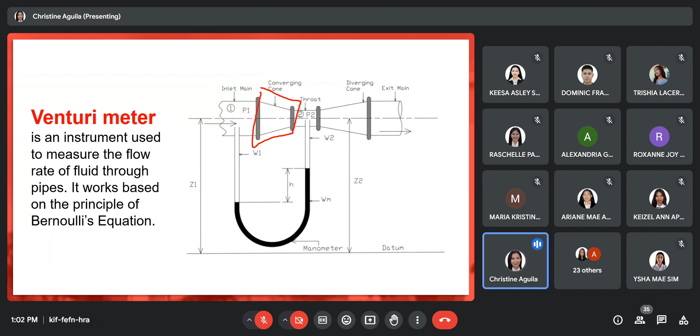So again, the venturimeter consists of 3 main parts. The first is the converging cone, the second is the throat, and the third is the diverging cone.

For example, imagine there's a pipe connected to our venturimeter. The fluid will flow first through the converging cone, then through the throat, then through the diverging cone, and then exit the venturimeter. Because the area of the converging cone decreases—it gets smaller from this section to this section—this decrease in area will cause an increase in the velocity of the fluid.

And of course, when there's an increase in the velocity of the fluid, that means there's a decrease in pressure, right? That's why there's a pressure drop at section 2, because of the area. Again, as the area gets smaller, the velocity of the fluid increases, and because the velocity increases, there's a pressure drop, or a decrease in pressure.

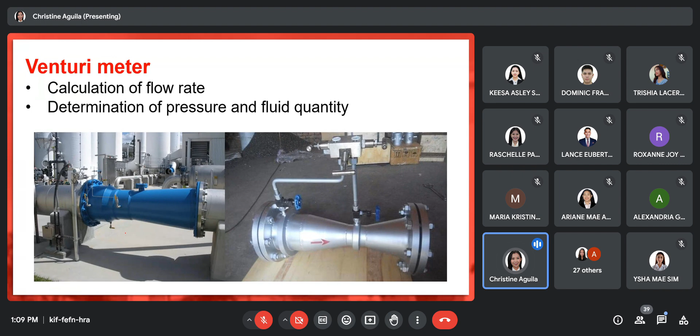So again, let's go back to the working principle of the venturimeter. Basically, the working principle of the venturimeter is based on Bernoulli's principle and the continuity equation.

Based on the continuity equation, all cross-sections with equal area will have equal mean velocity. While for sections without equal area, the velocity has an inverse proportionality to the area of the respective cross-section.

For example, this converging cone has a decreasing area from this section to this section. Since the area decreases, the continuity equation says the velocity increases. So there's an inverse proportionality between area and velocity.

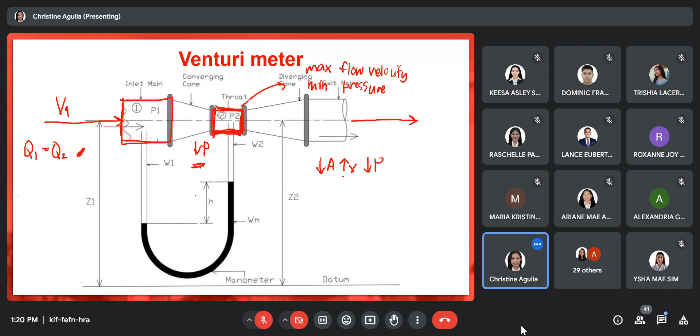Derivation of discharge.

So this term is pressure, this is kinetic energy, and this is potential energy. Similarly, this is pressure head, this is velocity head, and this is elevation head.

By applying Bernoulli's equation at section 1 and section 2, we can get this equation. Since we have a horizontal pipe, the elevation is the same, so those terms cancel out, leaving this remaining.

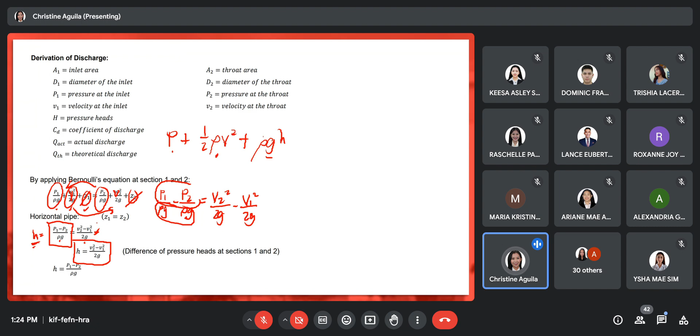That's the equation to find or calculate the difference of pressure heads, right? So this equals H. This means V sub 2 squared minus V sub 1 squared over 2G is equal to this, so this is also equal to H. So H equals V sub 2 squared minus V sub 1 squared over 2G. Let's remember that.

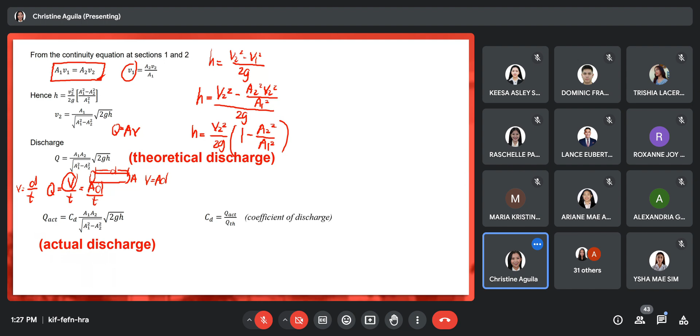So we can define this as A multiplied by D over T. And we know that D over T is equal to the velocity. So Q is equal to A multiplied by the velocity.

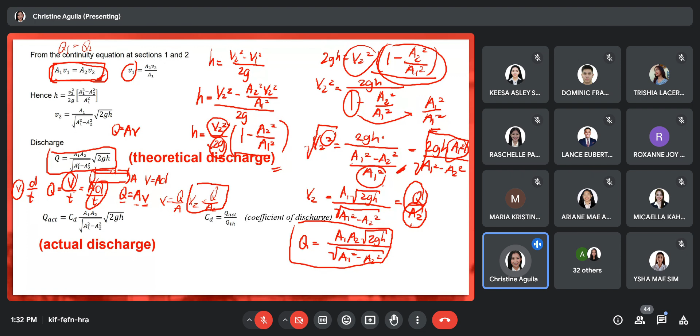Now, theoretical discharge is different from actual discharge. We can get the actual discharge by multiplying the theoretical discharge by the coefficient of discharge, which is equal to Q sub act over Q sub TH, or the actual over the theoretical discharge.

So that's it. Remember that the value of theoretical discharge is always greater than the actual discharge. Q theoretical is always greater than Q actual. Because theoretical is higher than actual, the denominator for the coefficient of discharge becomes higher, which only means that the coefficient of discharge will always be less than 1. So it's always that way, the coefficient of discharge can never be higher than 1, because theoretical discharge is always higher than actual discharge.

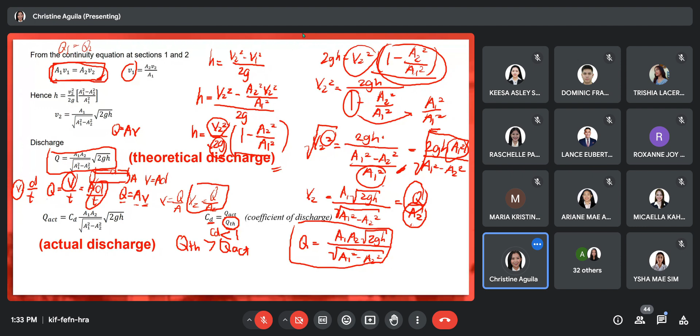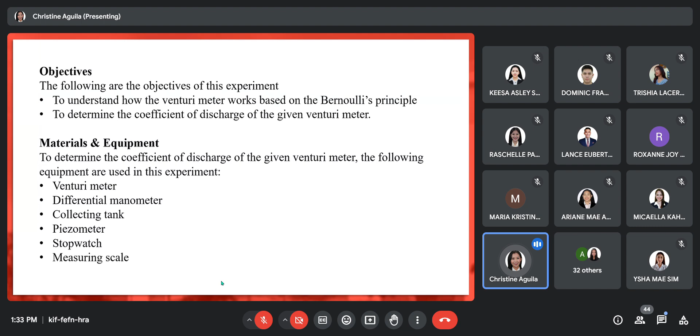Okay, let's move on to our experiment. The objectives of our experiment are already listed. The first is to understand how the Venturi meter works based on Bernoulli's principle. The second is to determine the coefficient of discharge of the given Venturi meter. Then materials and equipment, then procedure. Let's go to the procedure.

For this experiment, the pipe diameter needed is 40 mm. Make sure to take note that we'll be using a 40 mm diameter pipe.

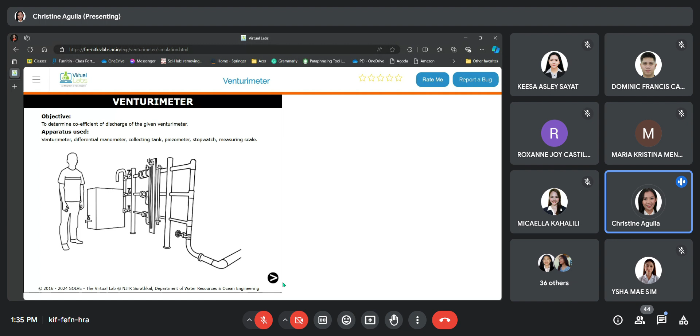By the way, in this experiment we have 4 trials. In the previous one we had 3 trials, here we have 4, and it's required to use all 4. Again, the required diameter of the pipe is 40 mm.

Let's select this. Then open the main inlet valve. Then open the pipe valve. Then change the knob of the manometer.